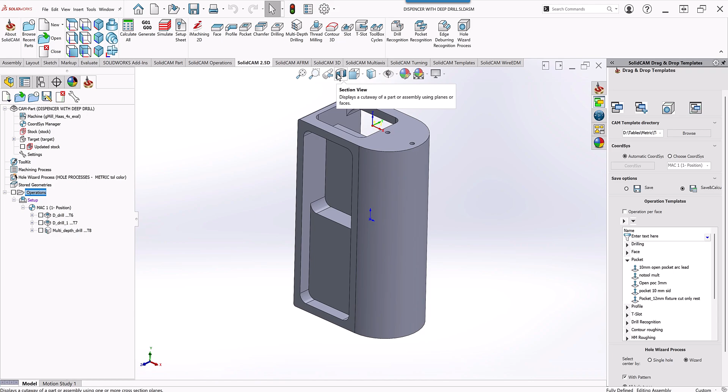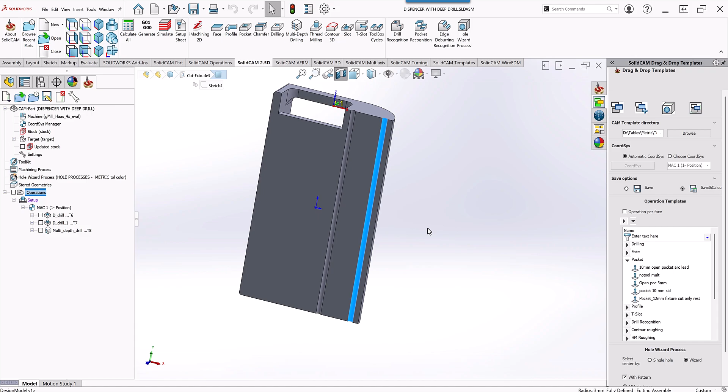We'll take a section view, and you can see that we have these holes going from top to bottom, and the actual depth of the hole from the very top to the bottom is a total of 250 millimeters. Now, the diameter of the hole is a 3 millimeter radius. That means it's a 6 millimeter in diameter hole. Now, what I've done here is as follows.

I've done the first two operations using a regular drilling operation. The first one being the spot drill, to put the spot drill on the top of those holes over there. And then the next operation was the regular 6 millimeter drill that is long enough to go as far as it can. And I used it to go to a depth of 35 millimeters, as you can see over here, using whatever technology I wanted to use. In this particular case, a pecking technology.

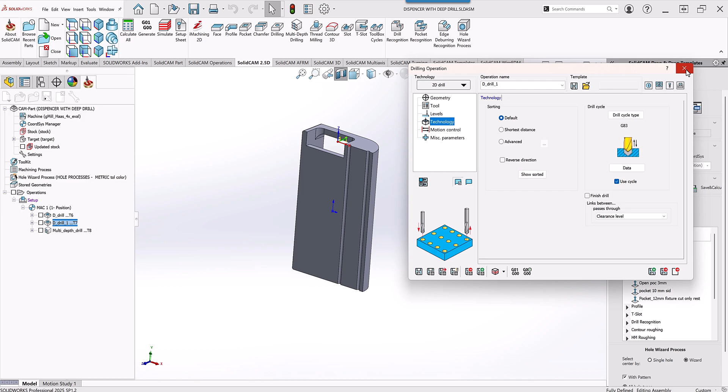Now, for my multi-depth drill, I wanted it to go from that minus 35 all the way down to the bottom. Now, we also should take into account that this is a long drill and a relatively narrow drill. So when I go into the hole and I start my spin rate, I don't want to necessarily start the spin rate outside, because this can possibly have the drill start swerving from side to side.

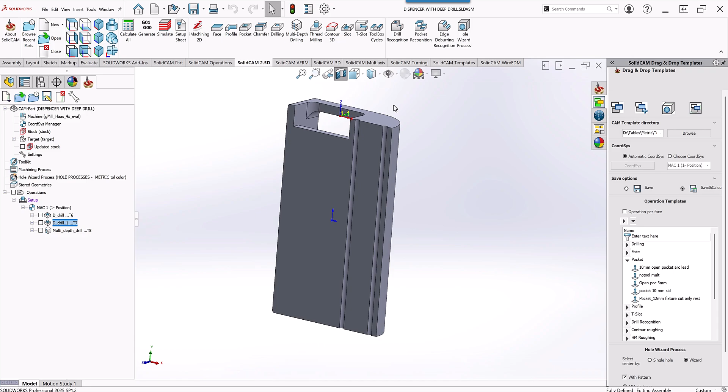So if I go into my multi-depth drill operation, you can see the following. I'm using the same geometry as I did with the other operations. The tool in this particular case is a very long tool with 300 millimeters of a cutting length. And the levels is 250 millimeters deep, all the way down to the 6 millimeter diameter at the bottom over there. Now let's see what I did in my technology.

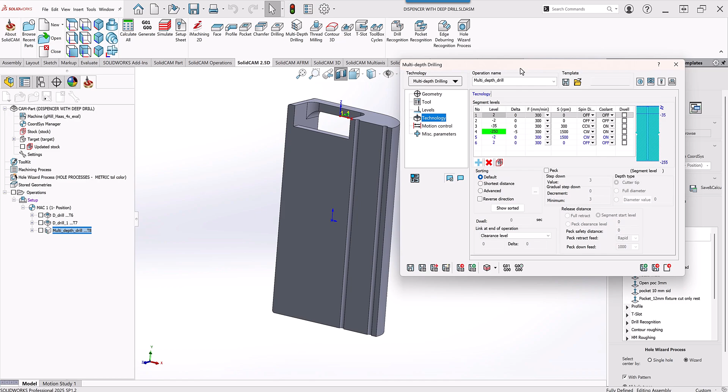In my technology, I did the following. I first sent the tool to 2 millimeters above the part itself with no spin rate. You should not start spinning. And then I sent it to -2 to go in just a touch. This was already drilled out, so I sent it in just a touch. Again, I did not start my spin rate yet. I want my spins actually to start when it's already in this area over here. Spinning on top may throw the drill to the side.

Then I continue on down to my -35. And there are some people that prefer, when they're going down this level in areas that were cut already, going in a counterclockwise motion until they get to the level that they want. Then we go down to the bottom, 250 millimeters, whatever feed rate they want, and the spin rate they want. And of course, they have complete control of their pecking and retract.

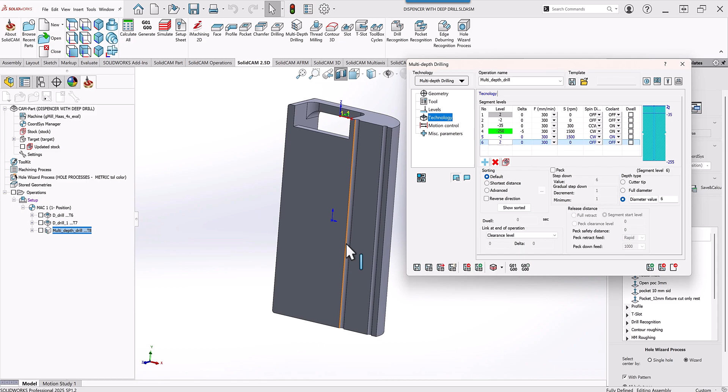When they get to the bottom at 250, then they go back up to -2. And when they get to -2, they go up to the 2 millimeter level with the spin rate off. This way it also leaves the part without any spin going onto it. Again, when it goes out this way, it will not throw the tool from side to side. Now, this is just a sample of how it can work. Obviously, you can program it any way you want.

Let's take a quick look at the simulation, and you can see that the tool goes down, and as far as the spin rate, it is completely off. There is no spin. Goes down to -2 millimeters with the tip, with the full diameter going to here, and feed rate at 300, but there's still no spin rate.

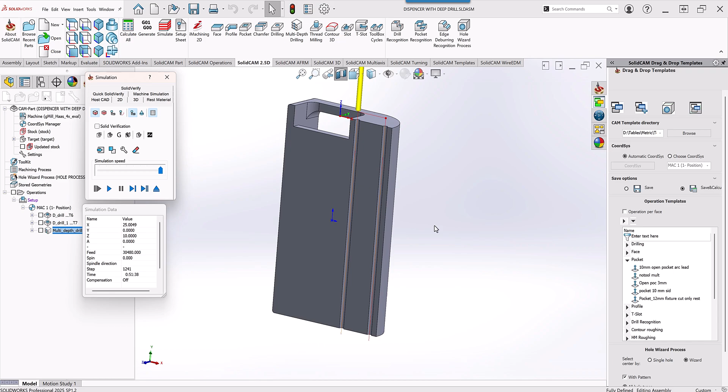Then the spin rate starts coming in as we start going down, and then it goes down with its pecking all the way down till it gets to the bottom. Speed it up a bit, and then when it comes out, it also stopped its spin rate. This concludes our recordings in our series of multi-depth drilling.